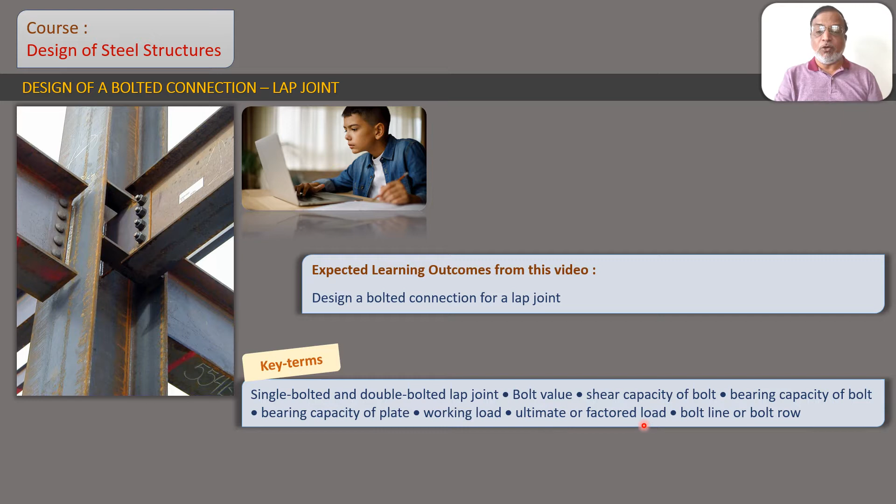The topic of this video lecture is design of a bolted connection for lap joint. The expected outcome from this video is design a bolted connection for a lap joint. We are going to use some key terms in this lecture. They are: single bolted and double bolted lap joint, bolt value, shear capacity of bolt, bearing capacity of bolt, bearing capacity of plate, working load, ultimate or factored load, bolt line or bolt row.

Friends, we will understand the design of a bolted connection for lap joint through a numerical problem. The statement of the problem is as follows. Read the statement carefully and try to understand while reading. Design a lap joint to connect two plates of size 100 mm by 16 mm thick and 80 mm by 12 mm thick to transmit a tensile working load of 70 kN. Assume 4.6 grade bolts and plates of grade Fe 410.

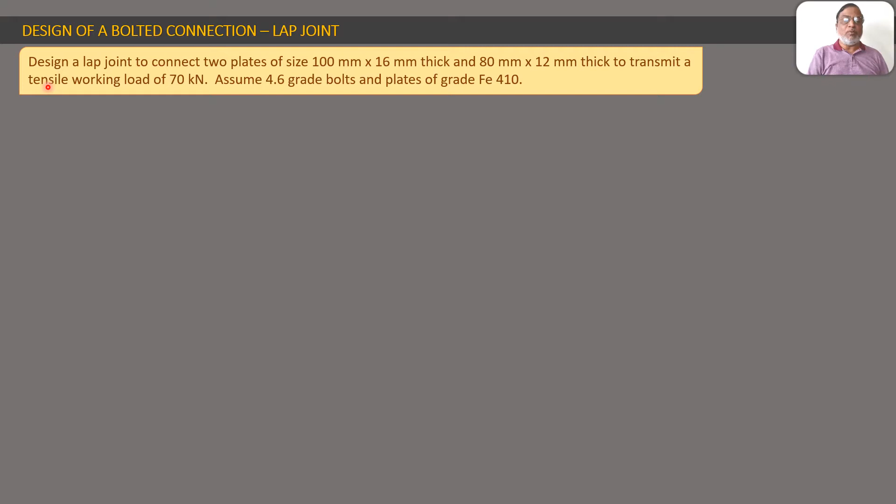Now we will try to convert this problem into a diagram. Let us read the problem again. We will understand the problem by analyzing the statement of the problem, that there are two plates 100 mm by 16 mm and 80 mm by 12 mm thick. The thickness is mentioned as 16 mm and 12 mm. The other dimension is 100 mm by 80 mm. So let us look here. This is plate 1 and this is plate 2.

We see that this is the top view. So lap joint means one plate is put over the other. So we see here that the plate 2 is placed over the plate 1 because this line is appearing as dotted, so it means that it is below the plate 2. Now we see that the width of the plate is 80 mm for plate 2 and 100 mm for plate 1. Now if we look at the sectional view, we will see the thickness. In the top view we will see the width of the plate. In the sectional view we will see the thicknesses.

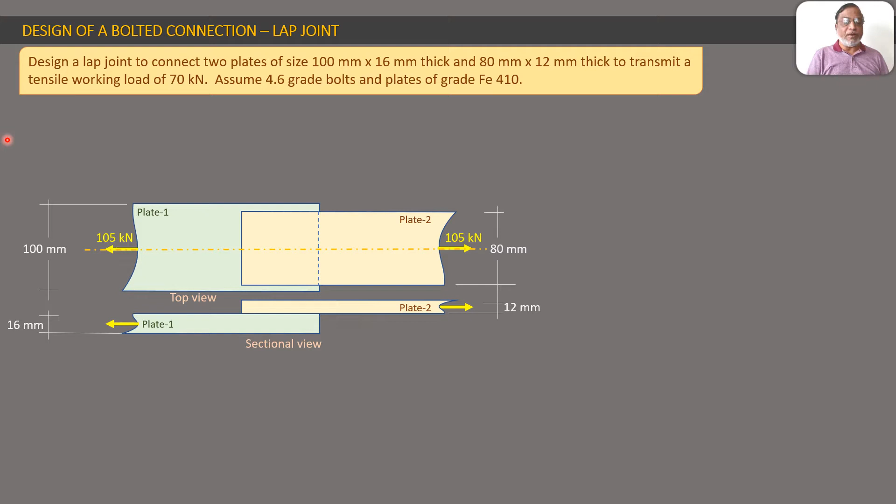We see here that the 100 mm wide plate is 16 mm thick and the 80 mm wide plate, that is plate 2, is 12 mm thick. Here we see the center line of the plate. So this is all about the arrangement of the plates. Now we want to connect these two plates by bolts. So we will be putting bolts here, here, here and so on, on this overlap distance. Now how many bolts we will require, what diameter of bolts, all that will be covered as a part of design. After having drawn the diagram clearly, we will now try to understand and interpret the data of the problem.

We have to always remember that if the statement of the problem is understood perfectly, that means if you try to understand each and every word of that statement of the problem, the solution becomes obvious and it follows automatically. So let us look here, problem understanding and data interpretation. Let us read the problem again.

In the problem we see that a tensile working load of 70 kilonewton is given. Here we can see these yellow arrows acting outwards. These are the force arrows. These are the tensile forces or tensile loads. So since it is tension, the arrow tips are away from each other. In the sectional view also we see the same, and in the top view also we see the same.

Now here we have to understand two important key terms, that is working load and ultimate load. We have decided earlier that we will be solving the problems of design of steel structures using limit state method. One of the important characteristics of limit state method is that it takes into calculation not the working loads but the ultimate or factored loads, by multiplying the working load by a load factor. So in the problem they have given working load of 70 kilonewton, and we will convert that working load into ultimate or factored load.

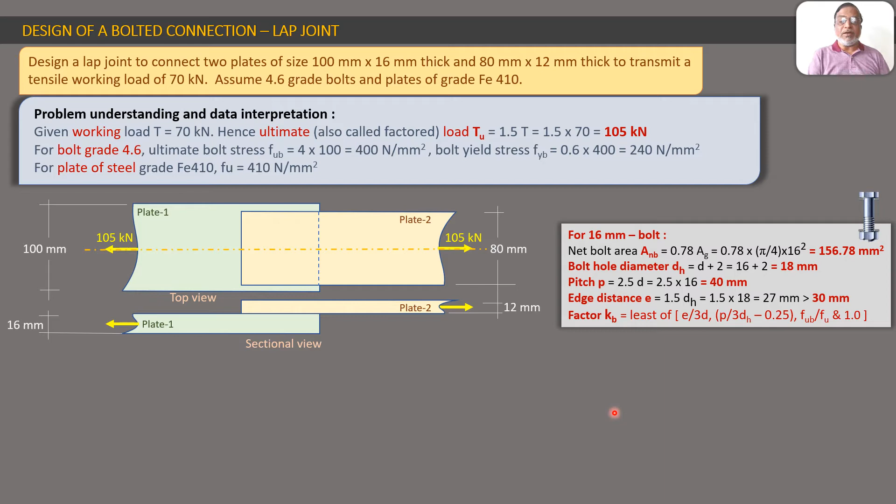Now we will proceed to the design procedure of this problem. After having done this preliminary work, we will go for the design calculations with step 1. Before we go for step 1, we will take some further data, further interpretation. We will assume a bolt of diameter 16 mm. The bolt diameter is not mentioned.

We are going to place 1, 2, 3, some correct number of bolts here. So when we provide a bolt, the bolt must have some diameter. That is not mentioned in the problem statement. If it was mentioned, there was no question of assuming. So we have to assume bolt diameter d equal to 16 mm. For a bolt diameter of 16 mm, we get all these numerical details.

Whenever we use a 16 mm bolt, we use the net bolt area. A bolt has two cross-sectional areas. One is the area at the shank, which is the gross area Ag, and the area at the root of the thread, which is 0.78 times Ag, called the net bolt area. We considered all this in the earlier video; this is just a revision. So for this 16 mm bolt, Anb equals pi by 4 into 16 square into 0.78, which gives 156.78 mm² as net bolt area.

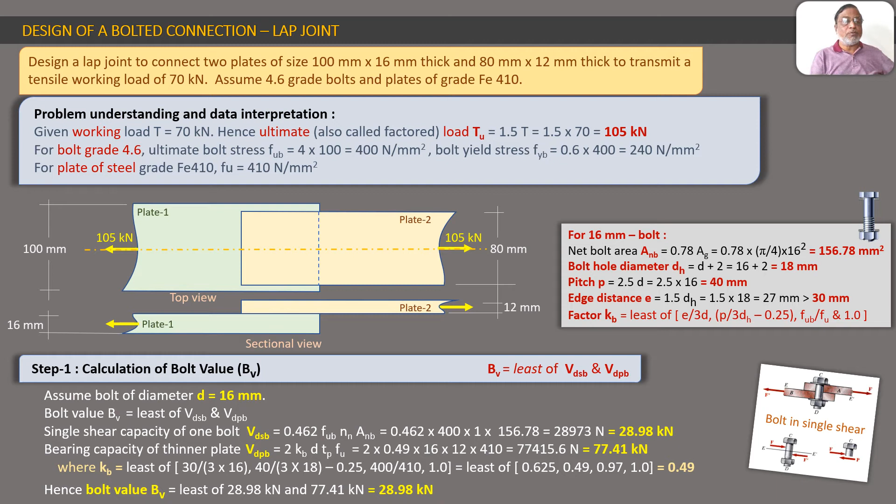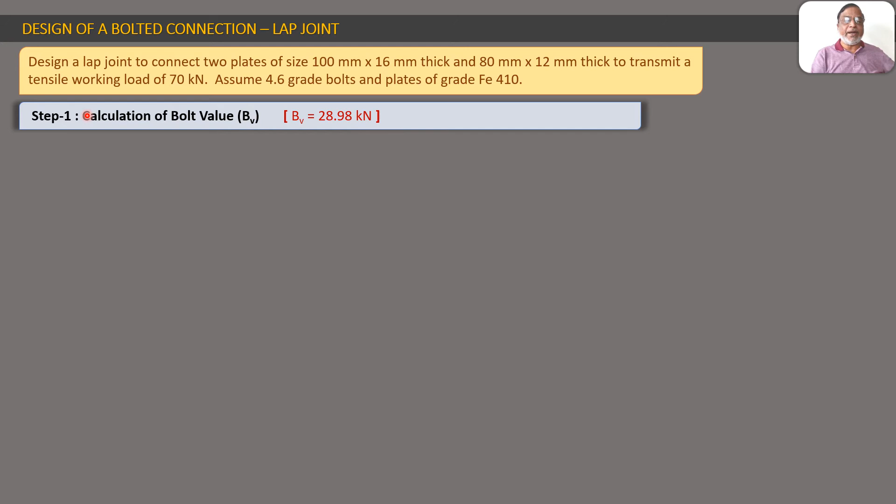Continuing the same problem, in step 1 we calculated the BV bolt value as 28.98. Now we proceed to the second step. The second step is very short and very simple. Once we know that a single bolt capacity is 28.98, and we want to resist a total force of 105, we can calculate the number of bolts required.

The number of bolts required to transfer the force, N, is equal to PU, the total ultimate force to be resisted, upon BV, the force resisted by a single bolt. So this is 105 kilonewton upon 28.98 kilonewton, which amounts to 3.62 bolts. It is impossible to provide 3.62 bolts, so it is rounded off to the nearest bigger integer.

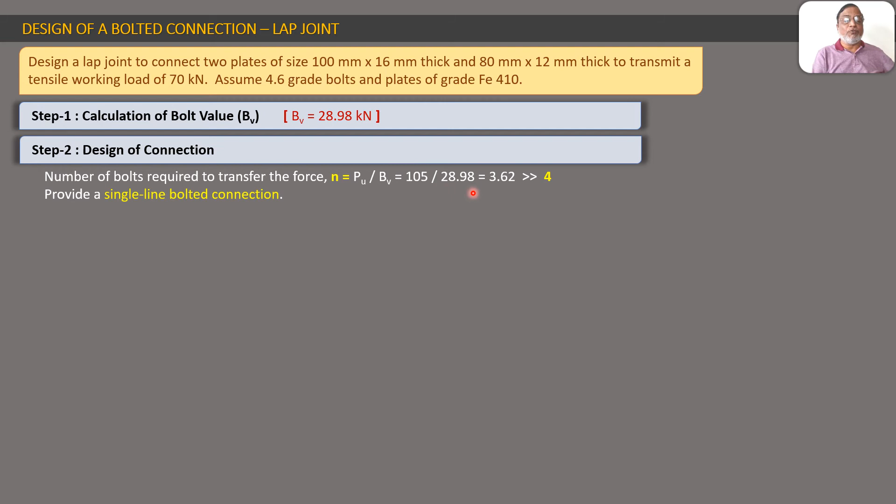So that is 4. The conclusion is that we have to provide 4 bolts of 16 mm to resist an ultimate tensile load of 105 kilonewton, with every single bolt resisting this much of the force. Now the next question is whether you will provide all these 4 bolts in a single line, or in 2 lines, 2 in each. All the options are available with us.

Usually we will try to provide the bolts in a single line, and that is called a single line bolted connection or single bolted connection. A single bolted connection does not mean that only one bolt is there in the connection. It only means the bolts are provided in a single line. So this is the conclusion: provide a single line bolted connection.

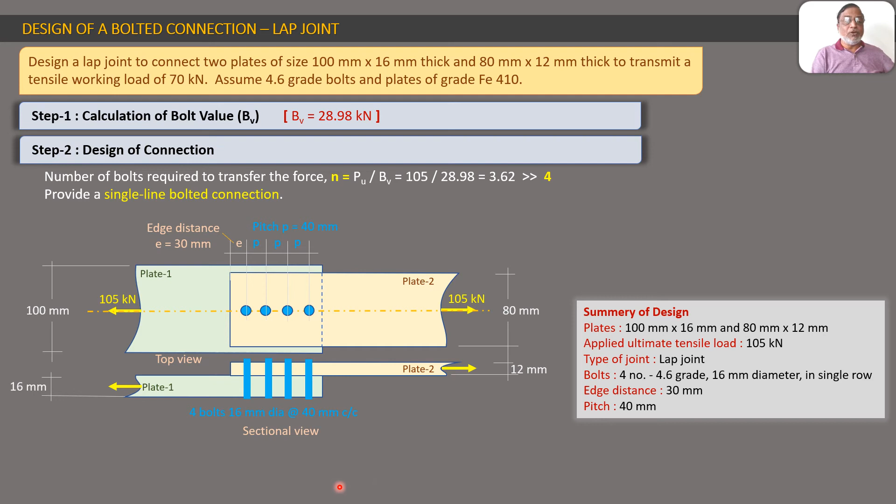Friends, before we close this video, we will go through some probable variations in the same problem. The same problem can be asked with little variations. The concept and procedure remain the same, but some numerical values will be a little different. The first variation is that ultimate load or factored load may be given directly instead of working load.

In this problem, a working load of 70 kilonewton was given and we converted that into the factored or ultimate load. But this value may be given directly, as a tensile ultimate load of 105 kilonewton and so on. In that case, you don't have to do the calculation of TU from T.

Then the second is the values of fub and fyb may be directly given instead of the bolt grade. Here the bolt grade of 4.6 was given. Instead of that, we can be given directly the value of fub and fyb. We calculated the value of fub and fyb from the 4.6 grade of bolt.

Then the third variation is calculation of only bolt value may be asked as a separate problem. In this problem, step 1 was calculation of bolt value and step 2 was design of connection, that is number of bolts and all the things. So step 1 only can be a separate problem, and in that case you don't have to go for step 2. So a big problem can be divided into small separate problems also.

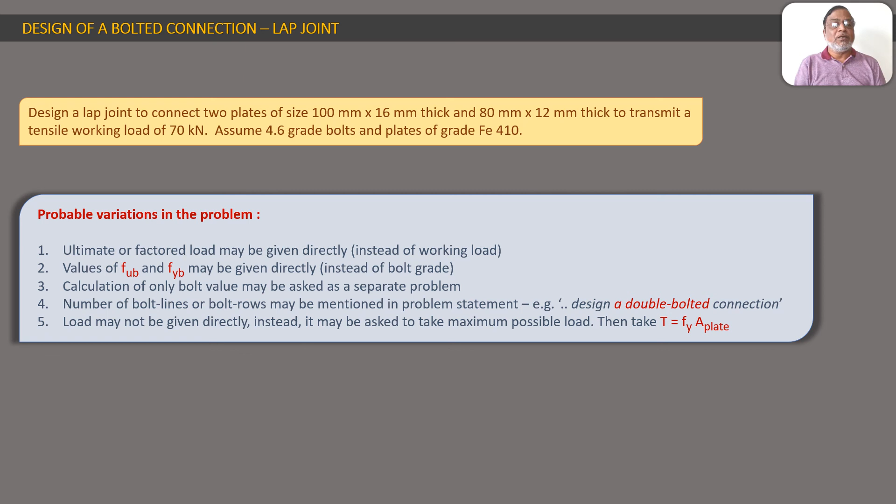So these were some 5 variations that are possible in the same problem. You can refer to different problems and solve about 5 problems of the similar type, so that you can master this design of a bolted connection with lap joint.

So coming to the end of the video, let us sum up whatever we studied in this video. We started with the expectation that the learning outcome will be design of a bolted connection for lap joint. Now you have to check whether you are able to design a bolted connection for a lap joint. Then we used some key terms in this video.

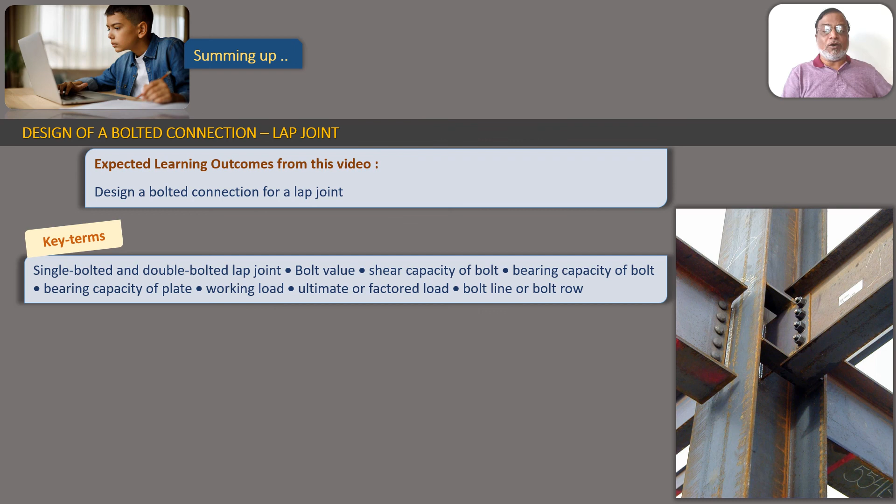So these are the key terms: single bolted and double bolted lap joint, bolt value, shear capacity of bolt, bearing capacity of bolt, bearing capacity of plate, working load, ultimate or factored load, and bolt line or bolt row. The key terms will help you to hold the content of the entire video in your mind properly.